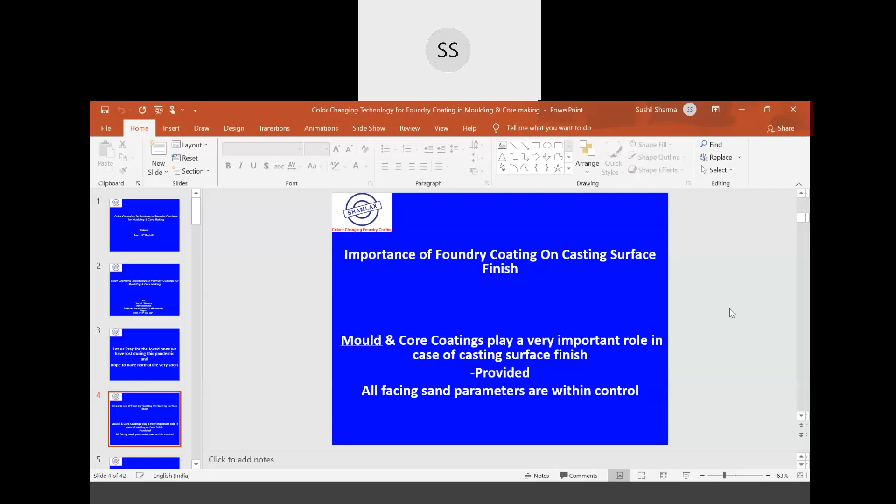Why do we need to switch over to water-based coatings? This is very important. During the last 2-3 decades, foundries have switched over from the conventional sodium silicate process to modern resin sand systems. But in most foundries, people are still using solvent-based or alcohol-based coatings with sodium silicate-based sand systems, and many times they are using water-based coatings for the resin sand system.

But if the foundryman uses solvent-based coatings with resin sand systems, there are different types of problems he can face. The problem is when you ignite the solvent-based coating, the heat generated during solvent burning is so high that the surface bonding of the sand particles becomes weak. This heat is sufficient to weaken the particle bond.

And when liquid metal enters the mold, the surface sand particles try to erode and move away from each other. Many times we get sand inclusions or a rough sand surface finish on the casting. That is the reason a foundryman needs to switch over to water-based coatings whenever they have modern resin sand systems.

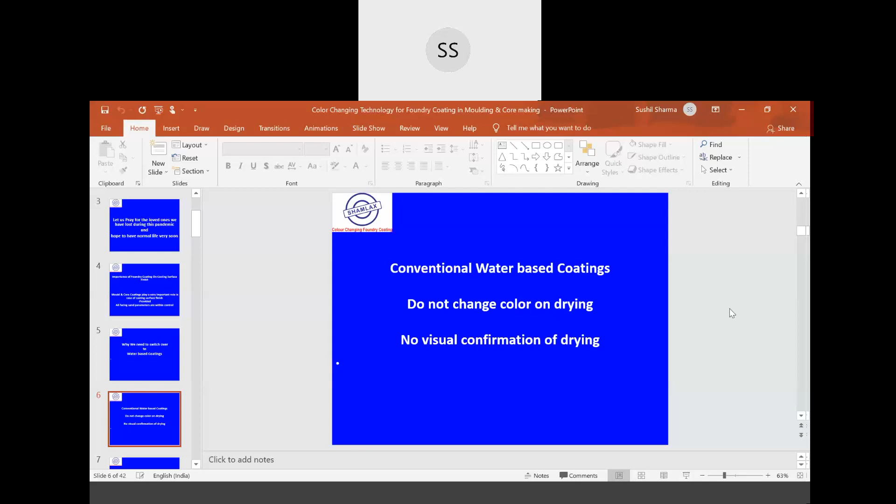And the challenge, as I already told you, is visual confirmation of drying. So in case of white coatings or any other colored coatings, the color after drying remains the same and there is no visual confirmation for the foundryman to understand whether the coating has dried or not. And they try to dry it with the help of a torch or use different methods like industrial ovens to dry the cores.

As I told you, complete dehydration of the coating, drying oven parameters working efficiently or not is one of the biggest challenges. Above process is critical as wet coatings result in serious casting defects like scabbing, metal penetration, blowholes, and surface porosity. And at such time, these color change coatings play a major role, which give a visual confirmation for the foundryman to understand whether the coating has really dried or not.

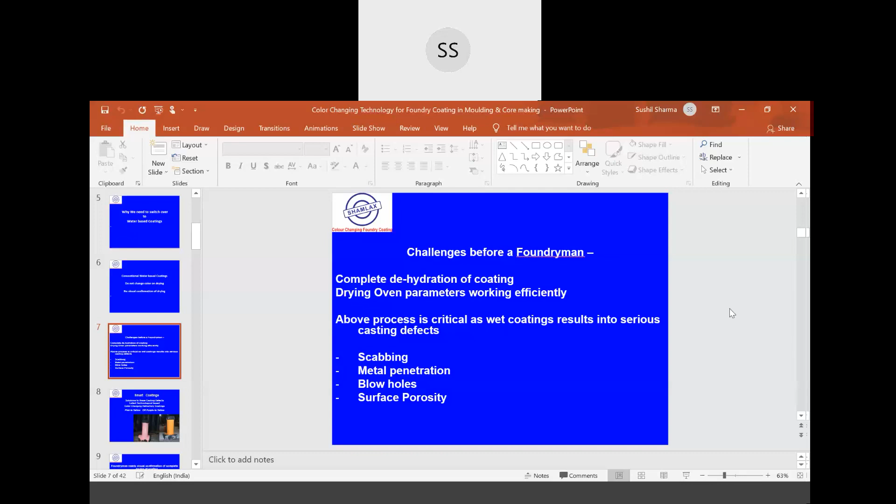We also call these coatings smart coatings because today we are in an era of smart appliances like smartphones, where the smartphones have already replaced the conventional mobile phones. So these smart coatings are solutions to these casting defects and latest technology based color changing refractory coatings.

And there are two types of coatings, particularly for most of the sand systems. If you consider a coating which is pink in color, which will dry to yellow, or the second coating which is purple in color, which will dry to yellow. It will cover almost most of the resin sand systems like your phenolic acid cured, alpha set, cold box resin systems.

So the foundryman needs a visual confirmation of complete drying of the coating to eliminate all moisture related defects. If there is moisture, as you can understand, you can have blowholes or fine pin porosity. To identify poor sand compaction in a core or mold, as it will absorb moisture, to optimize on cost of drying, avoid overheating by torch, avoid over dilution of the coating as color of the coating will fade.

Mr. Kulkarni, there is a problem. I am now on UPS and there is a power failure. I don't know how long it will continue. Okay, sir. Okay. Yeah. Okay.

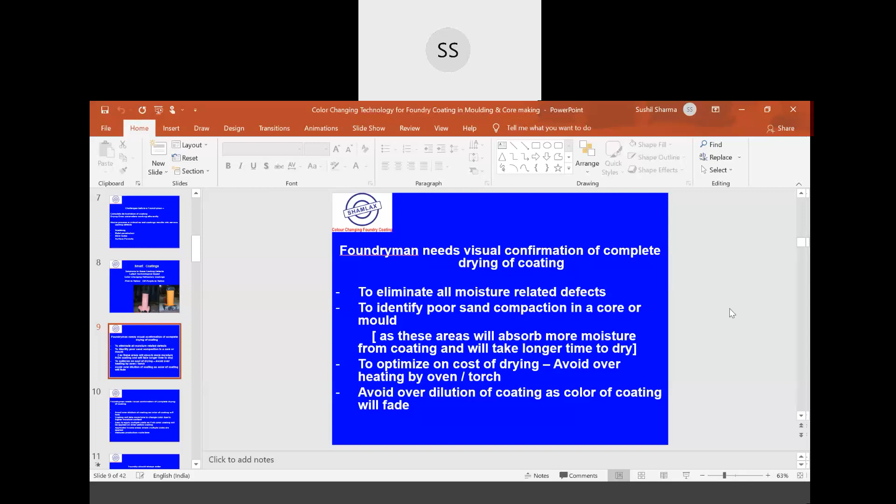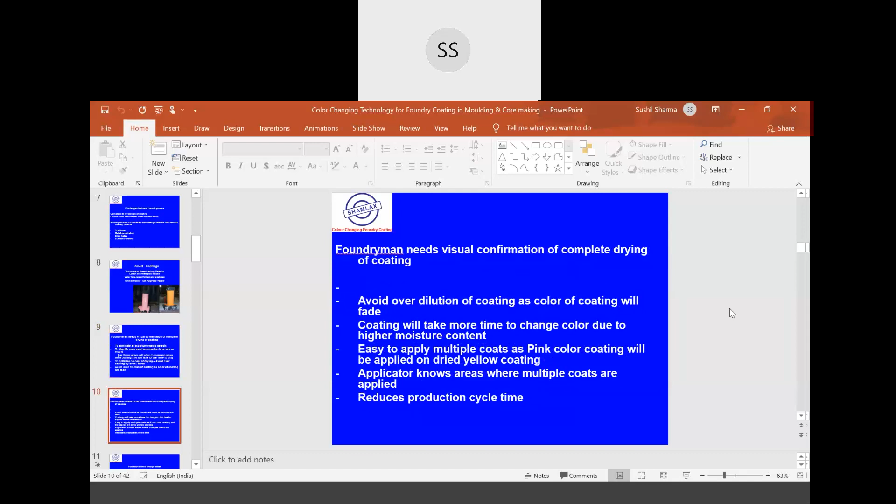Right. So avoid over dilution of the coating as color of coating will fade. A coating will take more time. I will show this particular video from one of the foundries. The coating is 444 XLCC. The coating is purple in color. And in this video, you can see the drying is done with the help of a torch, and the coating is changing its color from purple to yellow.

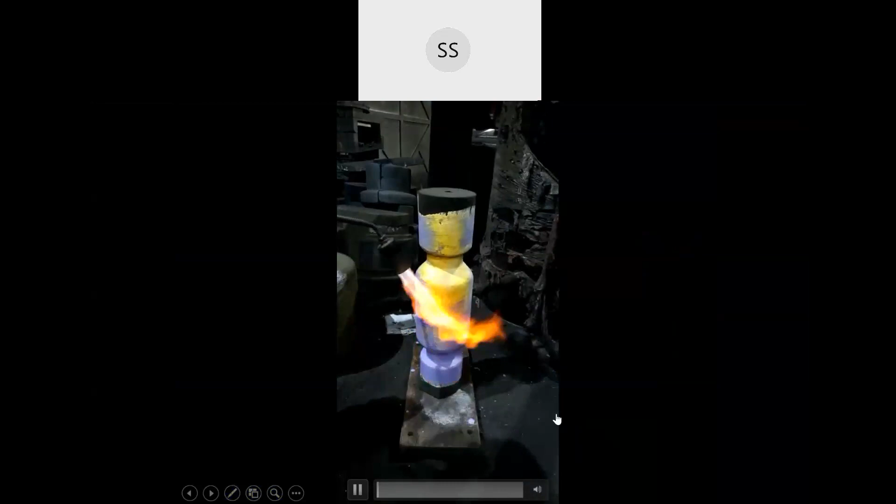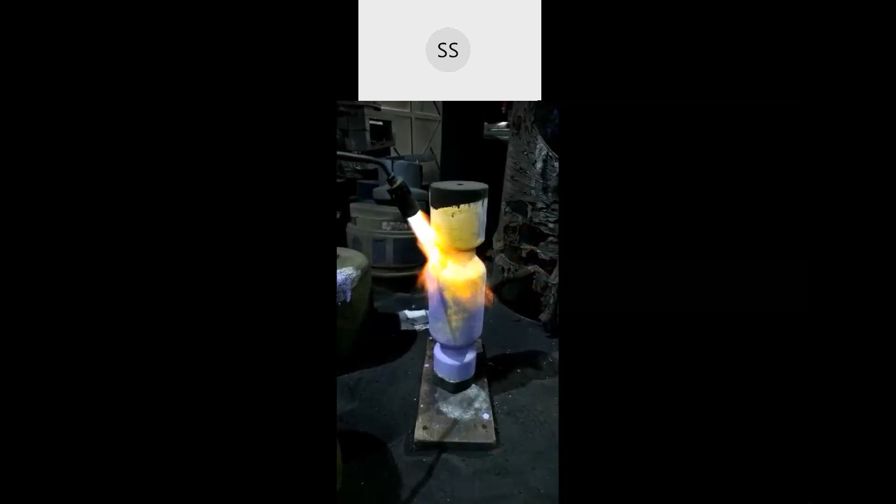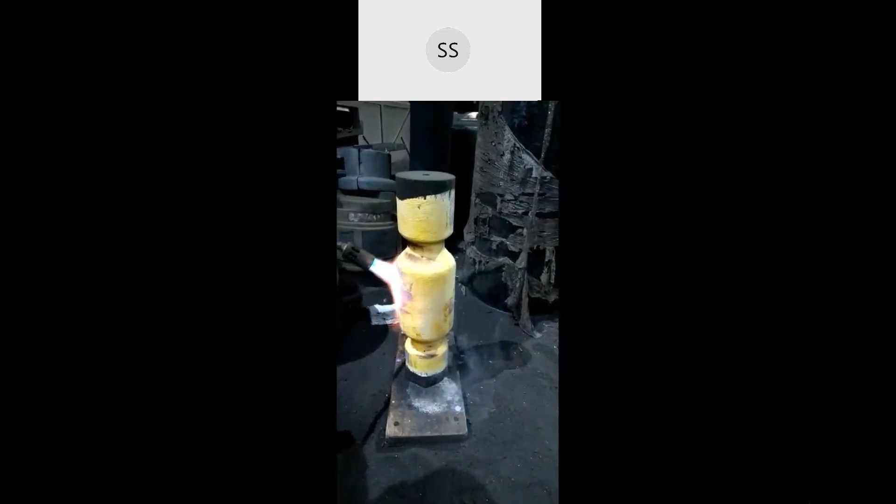Now, if you see the flame size of the torch, it is too much. Here, the foundryman can have a saving of the LPG gas, and the overheating of the coating can be avoided. So the coating has fully dried. It has changed from purple to yellow.

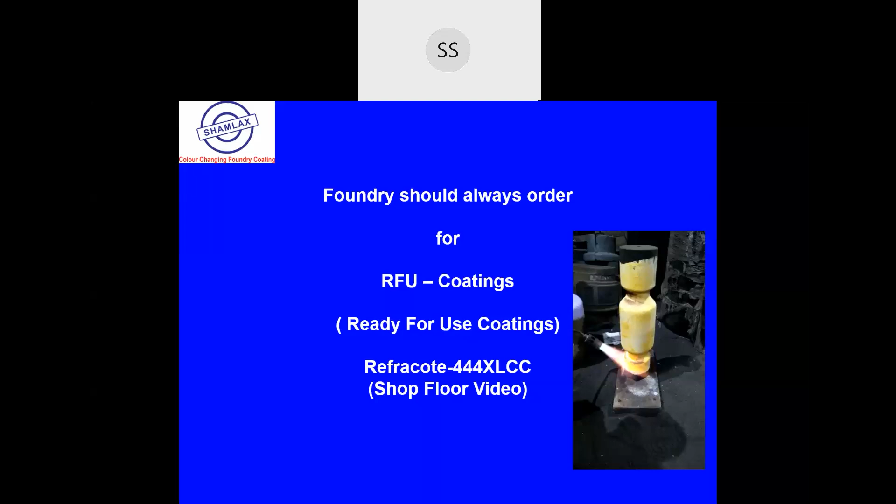And there is no need for the foundryman or the applicator to over torch or over gas the coating, because the biggest advantage of these color changing coatings is you can save up to 40% of the energy, whether you are having an LPG gas torch for the drying or you are using an industrial oven for the drying process.

Now, we have seen that in the latest trend, a few of the reputed coating manufacturers have introduced powder coatings.

Hello, am I audible? Yes, sir. You are audible.

Yes. So the foundry coating technology has gone a few decades back. If you see around 3 decades back, almost 30 years ago, the foundries were using the powder coatings. They used to mix the water in the powder, or at that time the solvent-based coatings were more popular. So the solvent was being used by the foundrymen for the coating. But after that, the foundry chemical manufacturers have come out with the ready for use coatings, what we call the RFU coatings.

But today, the foundries are facing the problem of competition and costing, and the solution given by the foundry coating manufacturers is again the powder coatings. So the powder coatings are being used by the foundry, and the ready for use coating is prepared in the foundry itself by using certain equipment.

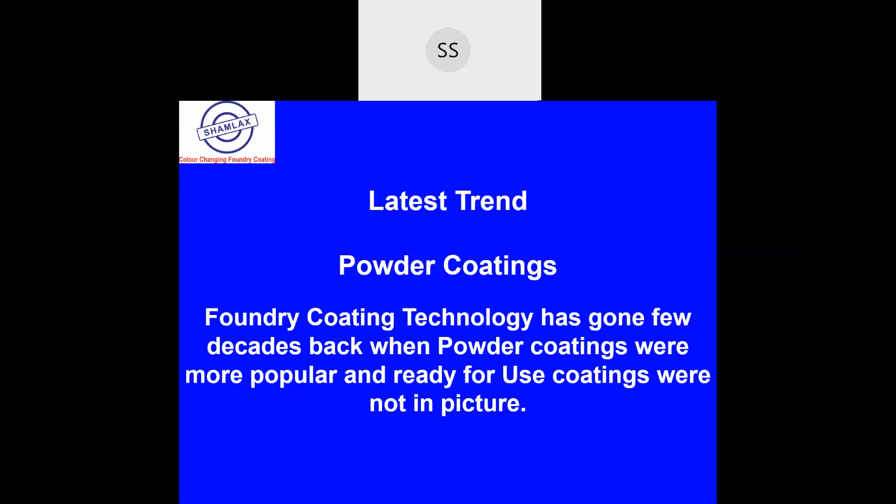Powder coating advantage is foundries are trying to save cost on packaging, transportation, and wastage. Today, packaging almost plays 4 to 5% of the cost, or even more than that per kg. Transportation itself is very high for the coating transportation if you are using RFU coatings.

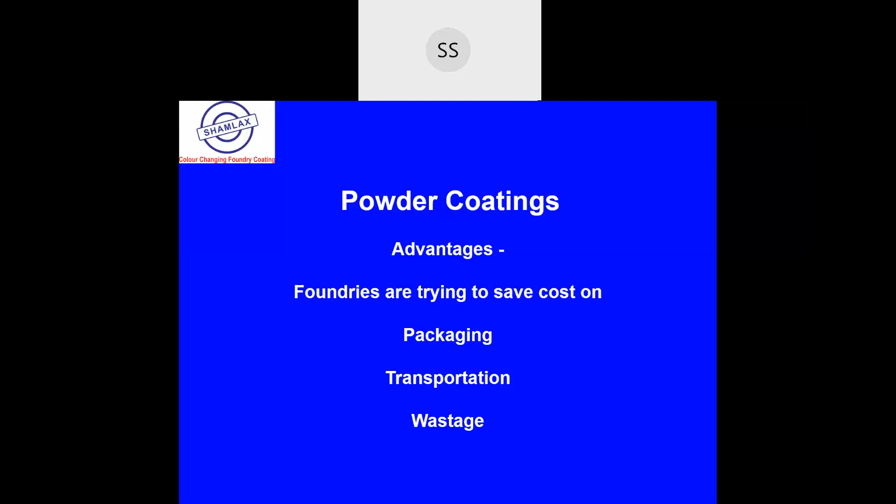And another is wastage. And considering all these factors, it is really useful for the foundry to use a ready for powder coatings. But there are certain drawbacks associated with these powder coatings. The disadvantages are easy to make coatings for a Baumé of 40 to 70 degree Baumé, not more than that.

40 Baumé, mostly the automobile castings foundries, they use aluminosilicate based coatings. They get basically a thick coating and then they dilute it to around Baumé of around 35 to 40, and then they use for the cores and the molds.

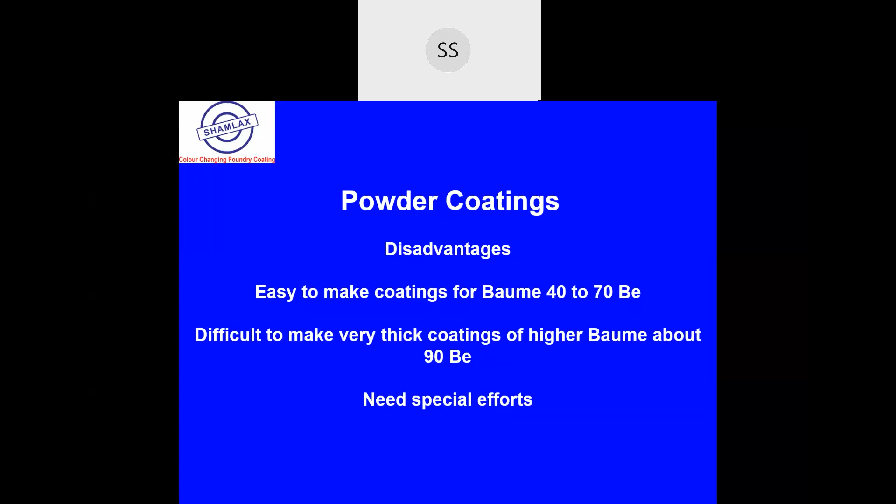But still, we have come out with the solutions, and we have come out with color changing powder coatings also, which we will show to you. Powder coatings, as I already told you, good for automobile casting producing foundries, not recommended for steel castings or making very heavy castings, where coating parameters required are of Baumé in the range of 80 to 95.

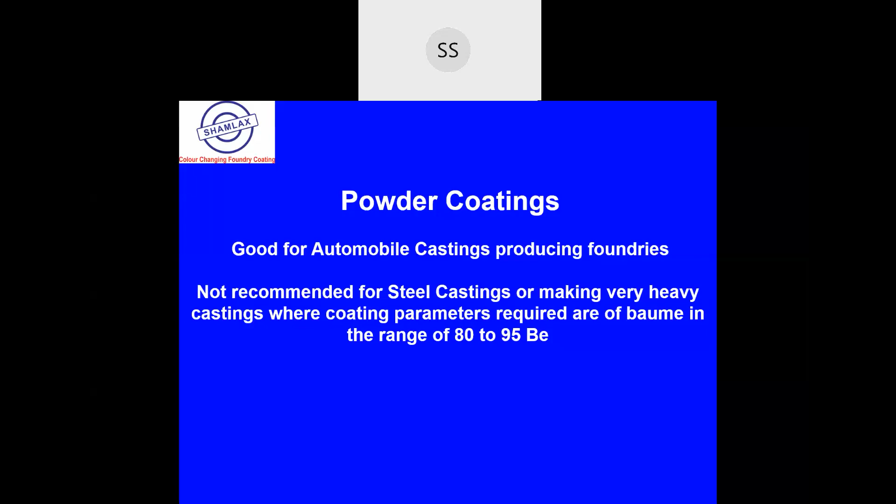Because if you are producing a coating by using powder coatings around 70 Baumé, then you will have to have multiple coats. And that is not advisable. It's better to have a 90, 95 Baumé and have a good coating thickness. We have come out with a Swiftcoat-100CC.

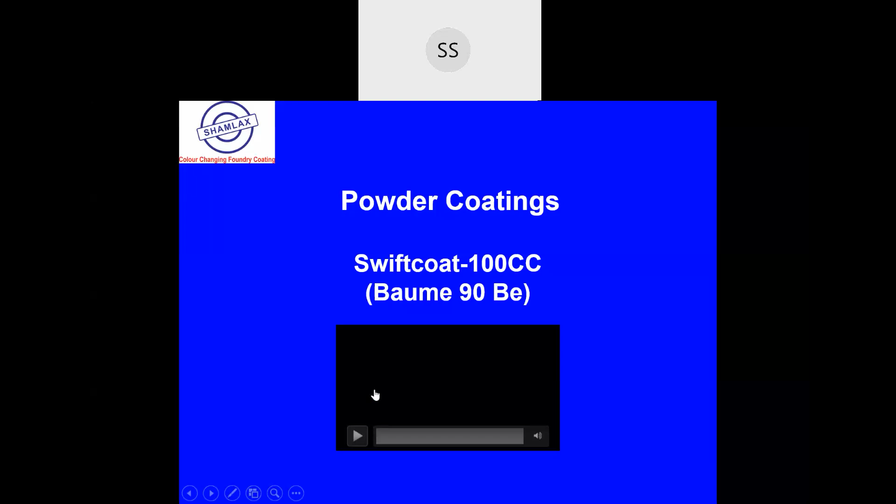Swiftcoat means it is basically a coating which is made very swiftly by the foundryman, and the Baumé achieved is around 90 Baumé. And I will show you this particular video. In this, you need to take some special efforts, and we have kept the vessel open just so that you can understand the manufacturing process.

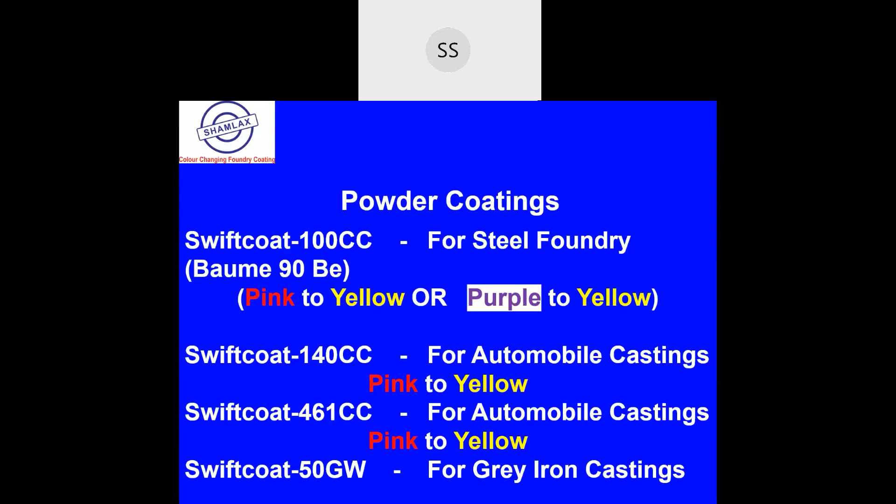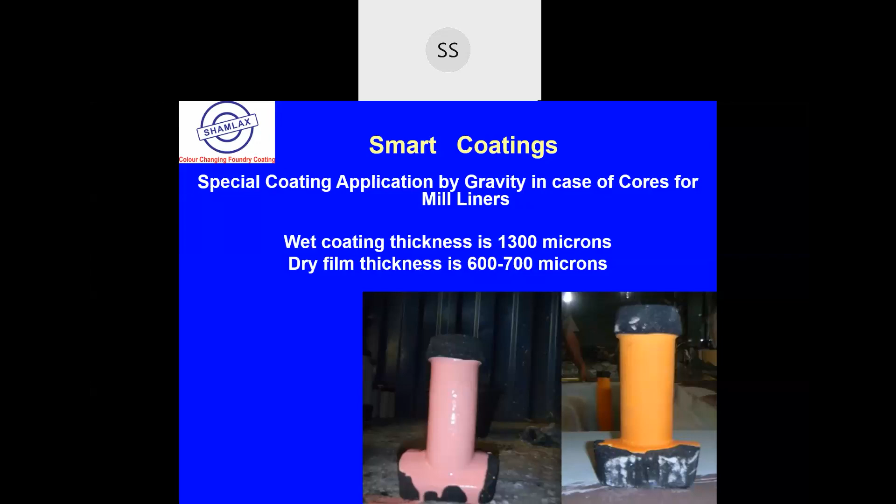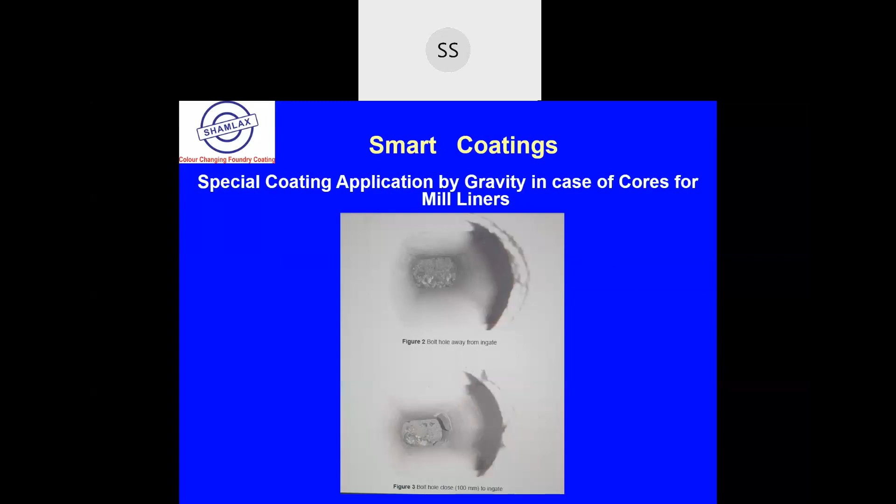So here the coating parameters, particularly the color changing feature of the coating, are very important. After drying, the cores are kept inside the oven at 90 degrees, because normally foundries produce n number of cores and store them at around 90 degrees so they can be used whenever ready. That's all in short from my side, because of the time limit, and I wanted you to have a feel of the color changing phenomena of these coatings.

As Mr. Kulkarni has mentioned, new properties. So, friends, these coatings were introduced in the Indian market; the paper was presented and then the field trials were started. We had a lot of resistance from Indian foundries to accept this phenomena. But during the last decade, many foundries have accepted it, used it satisfactorily and successfully, and achieved the cost benefits these coatings offer. Thank you from my side.

Thank you, over to you, sir. Thank you very much, Mr. Kulkarni. You are well in time, with only 5 minutes left. It's a nice presentation. You've given an idea of what color changing coating technology is, how it is important and how it works. The videos are very self-explanatory.